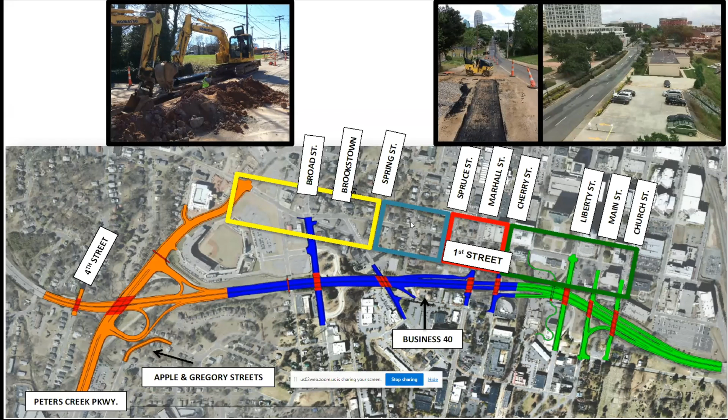Major utility upgrade scope of work. The city of Winston-Salem's existing water and sewer system needed to be improved, and there was a major water main upgrade along First Street right through the heart of downtown, from Peters Creek Parkway on the west side all the way to Church Street on the east. This work was completed in 2 block segments, and we coordinated for road closure and detours with both NCDOT and the city of Winston-Salem to accomplish this work.

Intersection improvements throughout the downtown area needed to be in place before the shutdown started. Utility relocation and upgrades were a big deal on the project. Most utilities had been in place for decades, and sometimes records were very scarce. It took a lot of coordination between the department and the city and utility owners to sort out what facilities were active and which ones were abandoned.

As can be expected, dealing with old infrastructure led to some challenges, but luckily we had a great team in place and a lot of help from NCDOT to get through obstacles so the shutdown could occur as quickly as possible.

Once the Peters Creek Parkway was constructed, the closure of I-40 Business began the fall of 2018. This allowed construction crews to start demolition of the existing roadway and bridges and begin reconstruction. The team focused on construction on the east end of the project. The eastern ramps were open to traffic in the fall of 2019. This allowed the highway traffic to access the downtown area from both the western side and now the eastern side of the project.

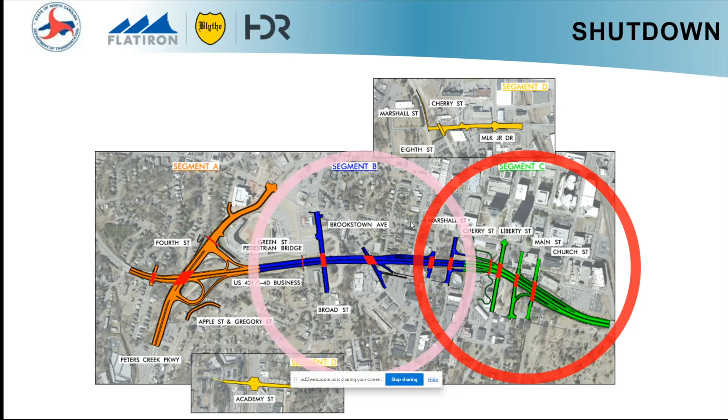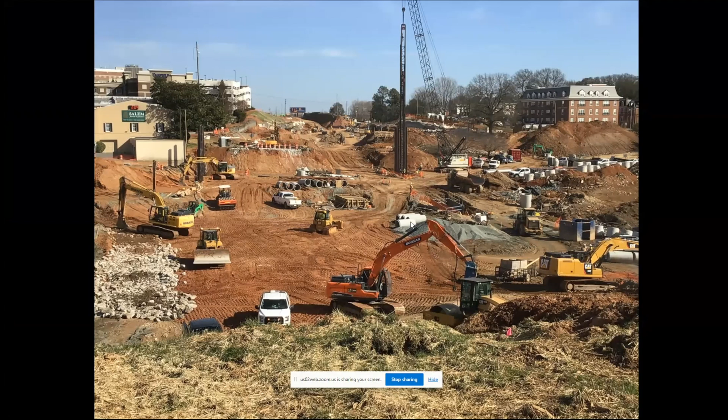The old highway was closed to traffic on November 17, 2018, and demolition started. This was, again, the first time NCDOT allowed complete closure of such a major highway for reconstruction. Once the shutdown began, it was essentially all hands on deck. Construction occurred concurrently in multiple areas throughout the project location.

Let's see, we have a couple of aerial photos. These aerials show progress between September 2018, prior to the closure of the highway, and December of 2018. So that's only 3 short months, just after the shutdown began. The photo here shows all the work at the Peters Creek Parkway area had to be complete before the shutdown began.

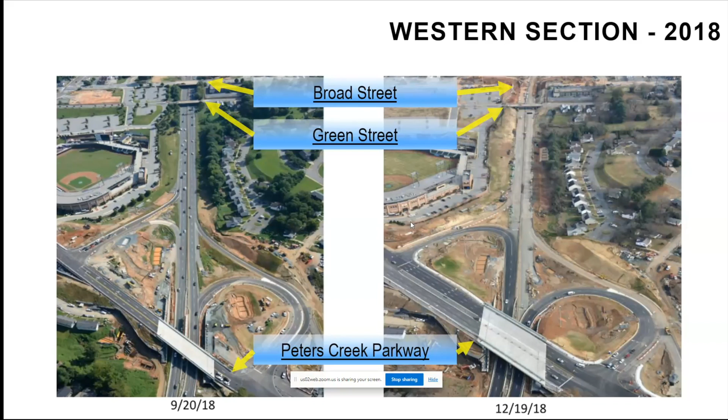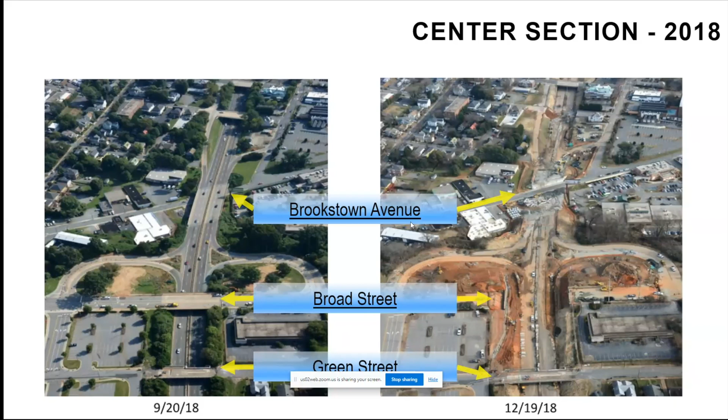This is the center area of the project. As you can see, a few of the existing bridges had to remain in place, which provided that north-south connectivity into the downtown area. And this photo is of the center to eastern section of the project. And there were some pretty significant changes to the roadway profile in this area.

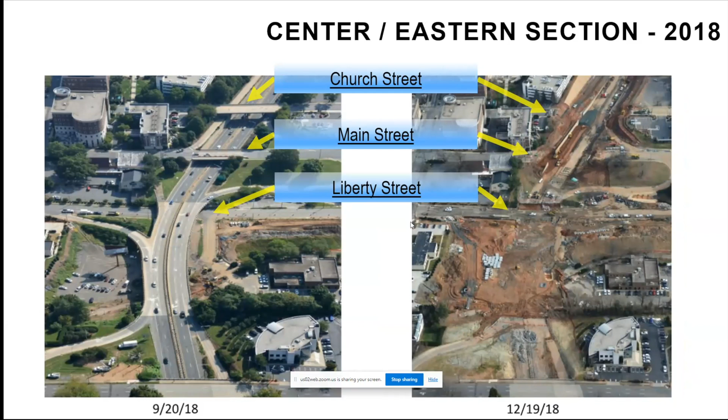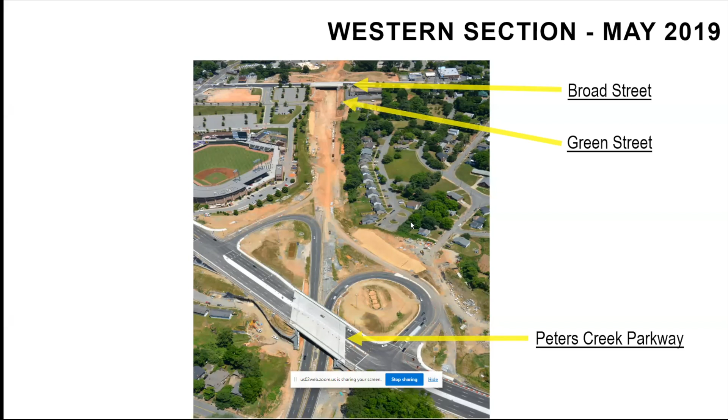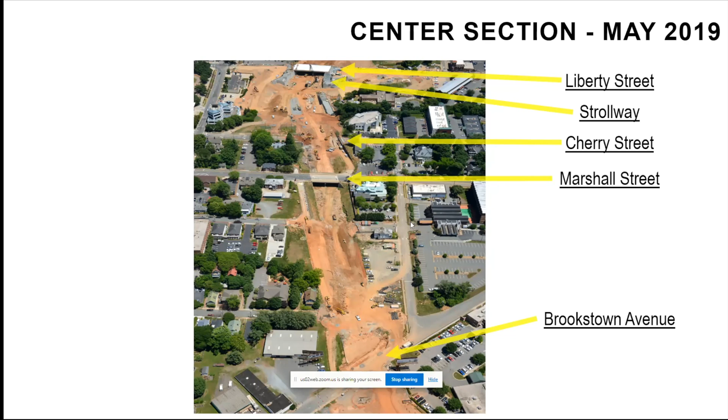At the eastern limits of the project, the new Main Street Bridge and Church Street bridges are complete and open to traffic. Again, this is just 6 months after the closure began. Main Street and Church Street were reconstructed and open to traffic, which allowed access into the downtown area. And this was followed by Liberty Street just 2 months later.

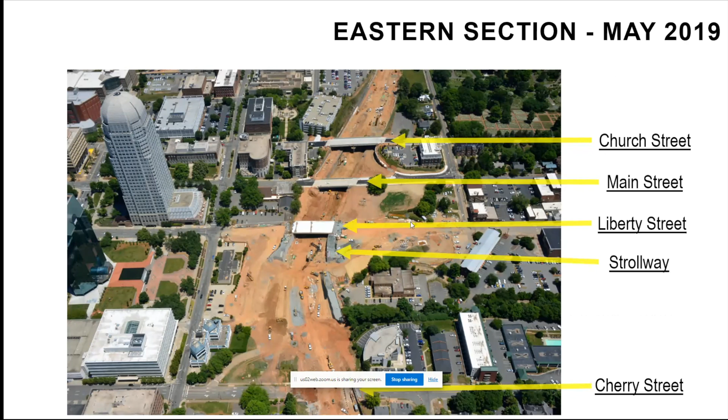To increase the clearances under the bridges while reducing impacts to the surrounding downtown areas, we had to lower the roadway profile and construct retaining walls. We had just about every type of retaining wall you can imagine on the project, from MSE to soil nail, cast in place concrete, and we even had some hybrid combination walls.

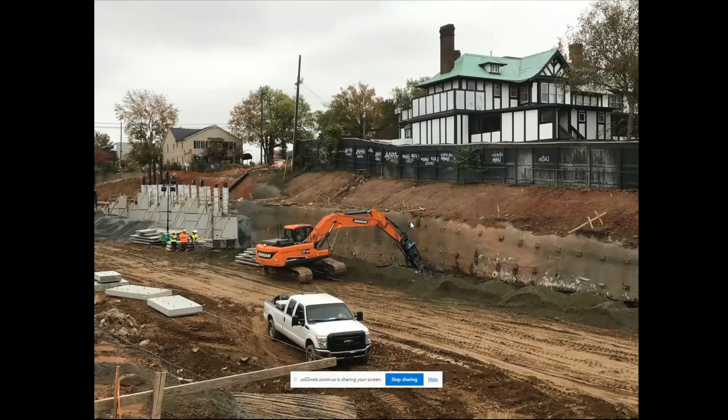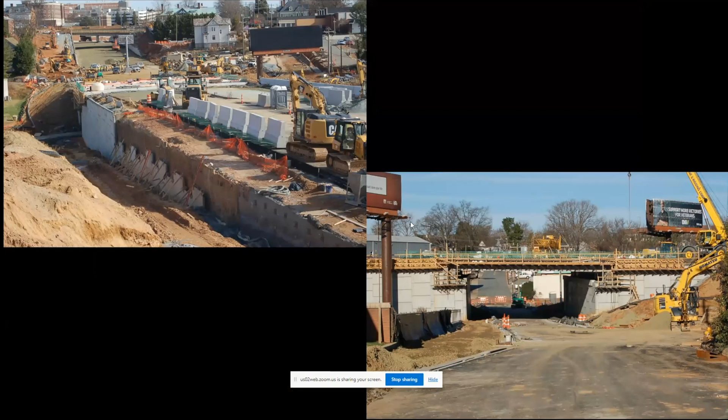This photo is an example of where we needed to avoid right-of-way impacts to historic boundaries. So you can see we used soil nail retaining wall transitions to MSE retaining walls at the bridge abutments. This photo shows one of the larger fill areas on the project and utilized a combination of MSE retaining wall and soil nail retaining walls to support the main line.

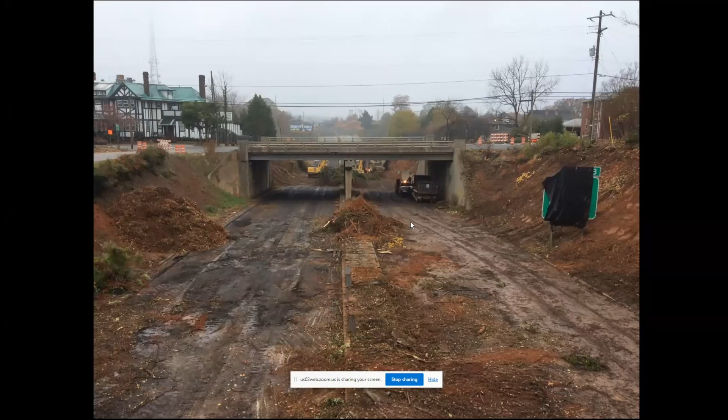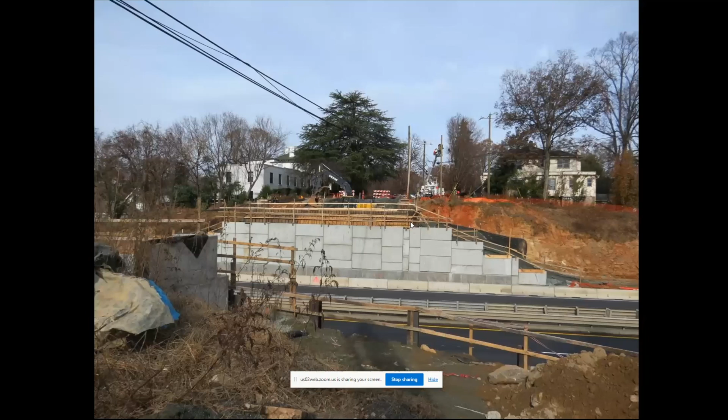The removal of existing bridge abutments can require large excavations. So we needed to consider these bridge abutments being removed when we evaluated the retaining wall types to go back in place. And throughout design and construction, it required close coordination with utility design and utility relocation for both overhead and underground utilities.

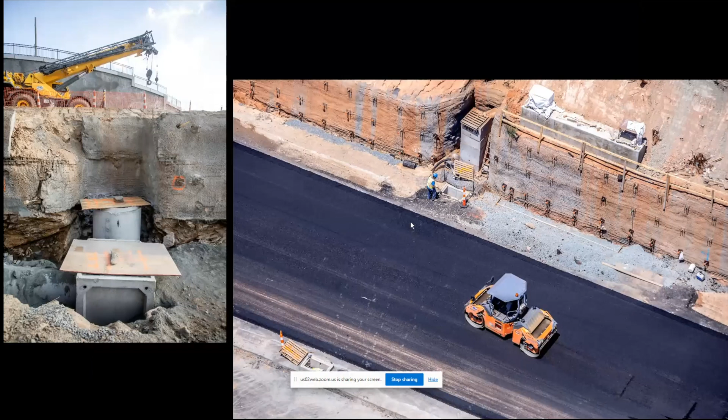Detailing the retaining walls around roadway drainage structures could be tricky, and it took a lot of coordination from the team to accomplish that. There were some instances during construction where the location of roadway drainage needed to be shifted, and we needed to make sure that any adjustments got carried through to the other disciplines.

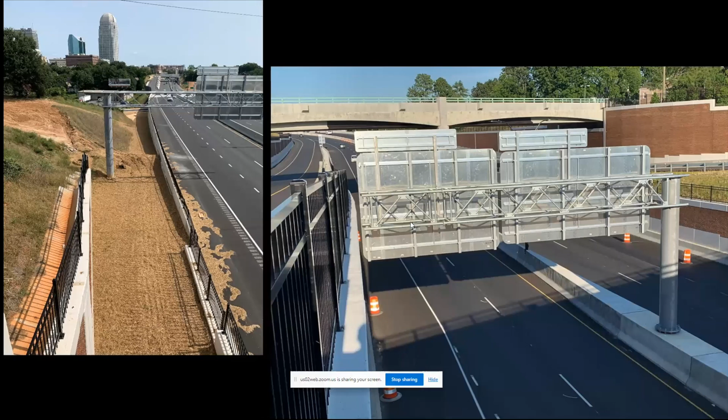In tight conditions on a project similar to this, it's important to consider placement and the details of overhead sign structures also. So be sure to coordinate those details early in the process.

So this project was a bit different than some of our typical NCDOT projects because the city of Winston-Salem was very involved throughout the project. They're essentially another owner because the project affected the city so greatly. We had specific committees where the design build team met with NCDOT and the city, and we would discuss important elements of the project.

We discussed aesthetics, a lot of talk about the multi-use path, signals for both NCDOT and the city, and of course, the water and wastewater utilities.

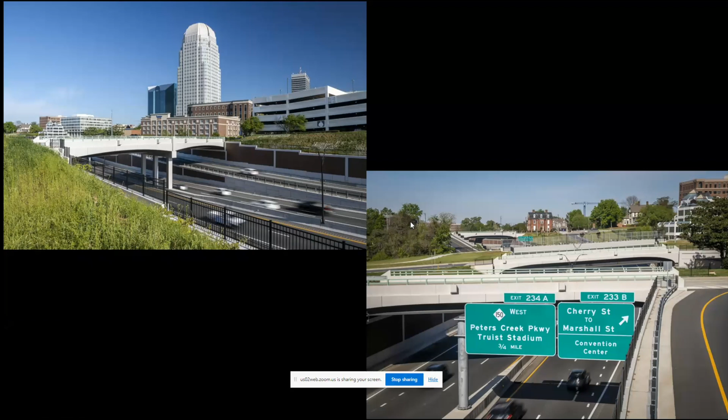Part of the aesthetic package, the new bridges included aesthetic elements that you can see here in the photo. You can see the decorative precast arch facades on the bridges. You can also see concrete pedestals on the bridges for future bridge lighting. And then the exterior face of the girders were painted to provide shadow effects to help the arches stand out.

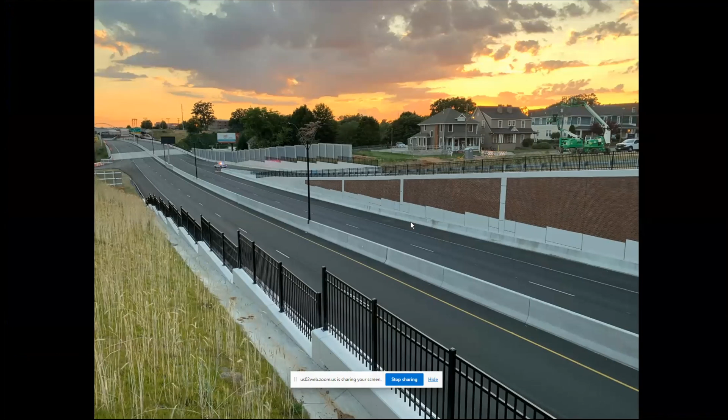Again, because aesthetics were such an important part of the project for the city and the community as a whole, a part of the aesthetic enhancement was to use brick facing on the retaining walls. You can see examples of finished product here with the brick facing on the retaining walls, along with the vertical concrete separations. There was ornamental fencing, which was specified along much of the corridor. And there was also textured noise walls, and you can sort of see that in the background of the photo.

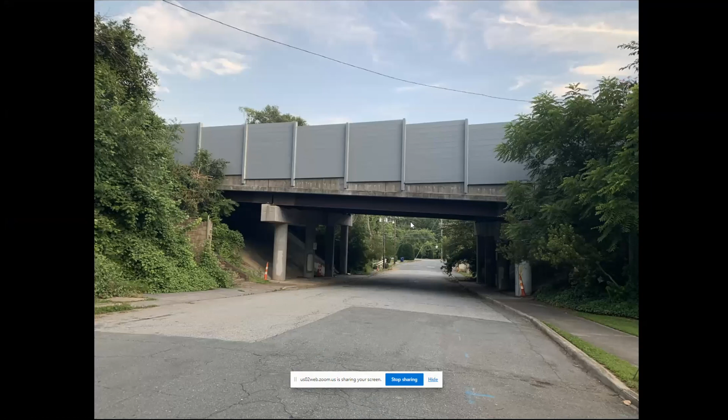A lightweight noise wall was attached to the existing bridge over Crafton Street, located on the western limits of the project. The design build team coordinated the panel texture and color with the city and the DOT.

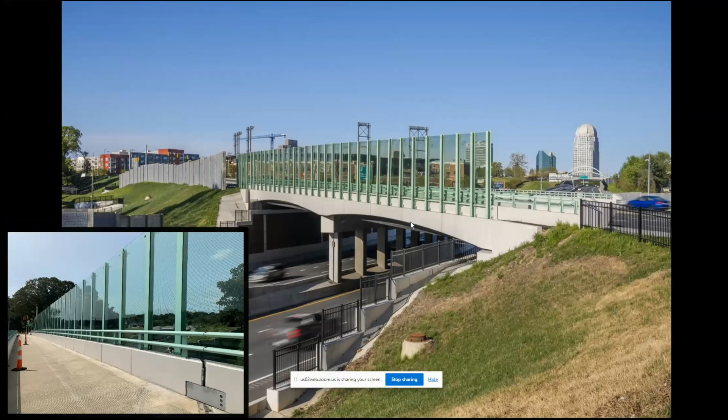And a transparent noise barrier was required along the Peters Creek Parkway Bridge. This interchange is a gateway into the downtown area from the west. So a transparent noise barrier was used to avoid obstructing the view of the downtown skyline as the motorist approached the downtown area.

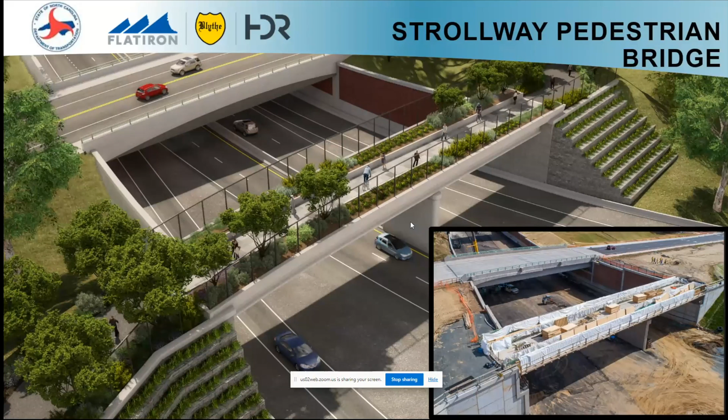So the Strollway Pedestrian Bridge is one of the two signature structures on the project. It's located near the center of the project, and the city of Winston-Salem wanted to have a bridge that provided a unique park-like experience for its users. In the corner is a construction photo from November of 2019, and it's got a very similar view as the rendering.

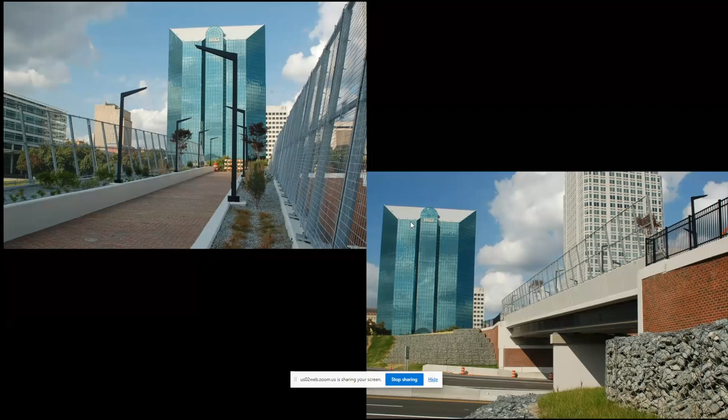So there are built-in planters along both sides of the brick pathway. There's decorative lighting along the fence and in the bridge deck along the path. And the pedestrian fencing is tilted out away from the pathway to give an open feel.

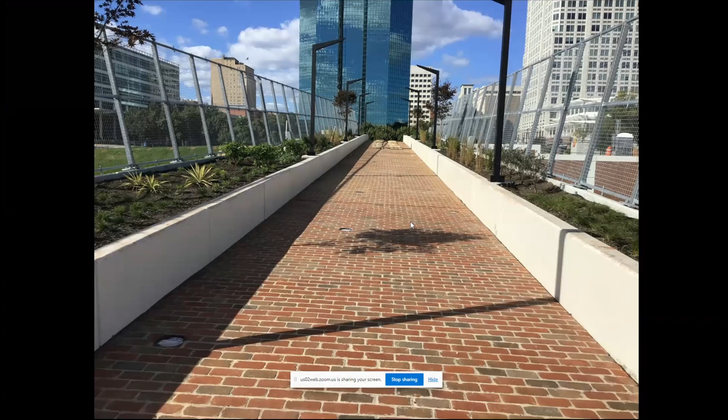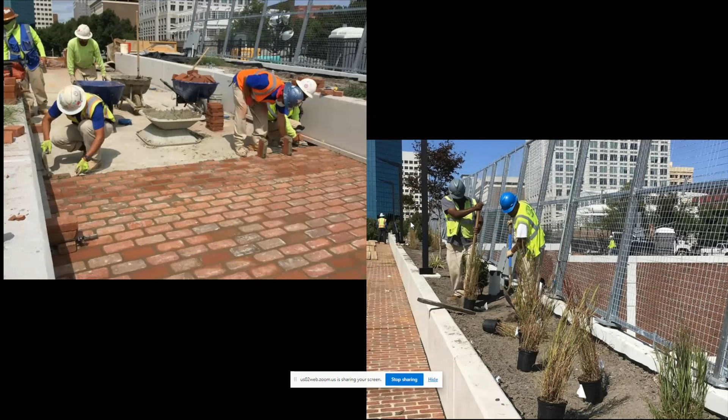And the team worked very closely with the city to help determine the height of the planter walls and the angle of the pedestrian fencing tilting outward, as well as the material to use for the pathway. The city chose to have brick pavers along the pathway, which coordinated with other pavers throughout the city. So our design also included landscaping for the planters and irrigation and drainage plans.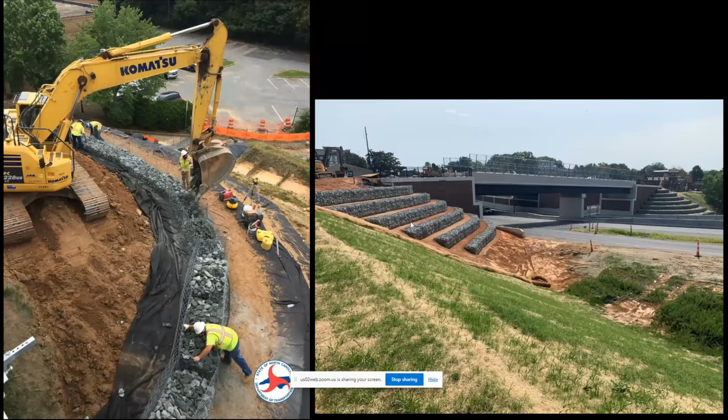The team worked with both the department and the city to develop a tiered gabion basket system at the bridge abutments. And these were added for aesthetic interest. So here are just a couple of photos of the finished bridge. You can see that the exterior concrete girder was painted dark to provide that shadow effect.

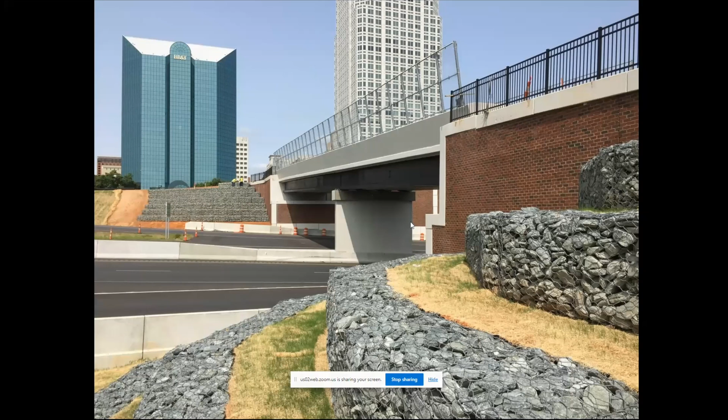And a solid pier wall for the interior bent was an aesthetic requirement by the city. In this photo, you can see the pedestrian lighting from above, as well as the lighting in the bridge deck itself, and you can see the finished landscaping.

So now the Green Street Bridge. The Green Street Pedestrian Bridge is a signature structure crossing the corridor and connecting to the multi-use path near the baseball field. The structure is a self-tied arch with two sets of inclined arches and a longitudinally post-tensioned concrete deck. I don't think you'll see another one like it in North Carolina.

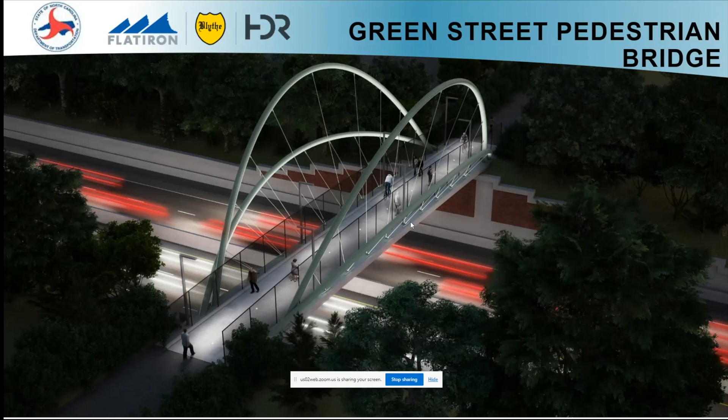The city of Winston-Salem and NCDOT provided a concept and prescribed aesthetic requirements for the structure. And the design build team led by HDR worked closely with the clients and other stakeholders to design and construct this innovative structure, meeting the aesthetic and functional objectives of the concept.

During the early stages of design, we met regularly with the city's Creative Corridors Design Review Committee, and we incorporated aesthetic features throughout the project to really bring their vision to reality. The geometric layout of the bridge, the shape of the arches, the hanger rod arrangement, and some of the connection details were just a few of the features that we coordinated on the Green Street Bridge.

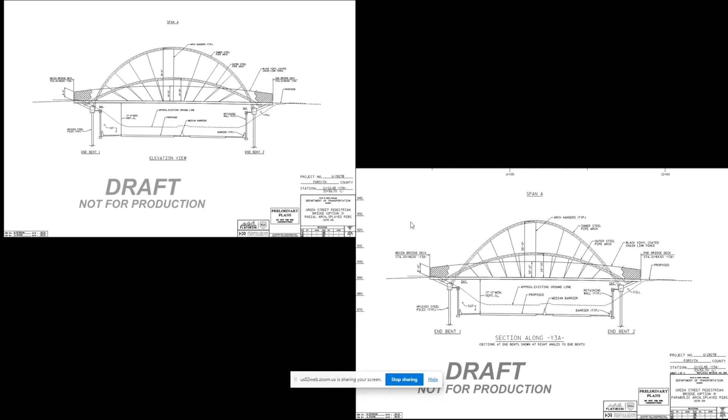So the bridge, again, it's an unbraced self-tied arch structure. It's got two sets of inclined arches and a longitudinally post-tensioned concrete deck. The taller pair of inner arches are inclined outwards at 13 degrees, and these arches carry most of the load. The lower pair of arches are inclined outward at 30 degrees, and they do carry some load, but not as

much as the inners. The bridge deck itself is supported by a series of stainless steel hanger rods. There's 9 hanger rods to each arch for a total of 36 hangers. Lower gusset plates are embedded in the concrete edge beam of the bridge deck, and they're used to connect the hanger rods to the bridge deck. And upper gusset plates, which are welded to the steel arch ribs, are used to connect the hanger rods up high. And the steel arch ribs are connected to concrete pilasters with anchor rods.

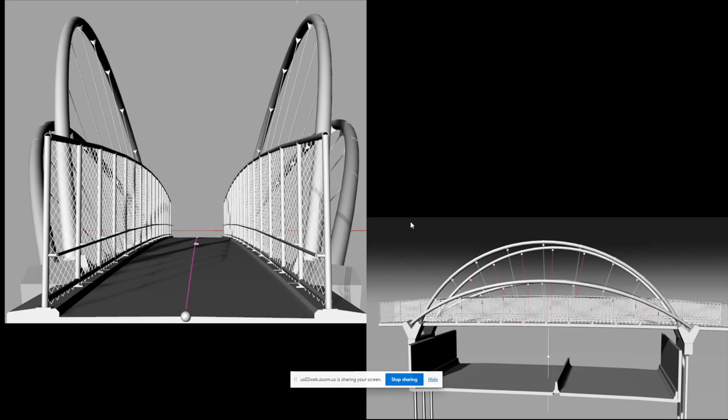So as you can see, there's a lot of complex geometric features with the bridge, which affect the design and carry through to fabrication and construction. We needed to make sure there's symmetry in the arch curvature along the length of the bridge. We balanced the way that the arches tilt from one side of the bridge to the other. The location of the upper gusset plate connections along the length of each of the arches and the angle of these connections was important. The location of the lower gusset plates in the concrete deck edge beam, as they're located along the length of the bridge and from side to side, and even the height of the gusset connections were important features.

Deviations in any of these elements changed the angle of the hanger rod connections and changed the design loads. So those were important for us to keep a close eye on. The uniqueness of this structure required tight tolerances on several of those details. And during design, we developed a parametric bridge design model. This was beneficial in the staged analysis of the structure and proved to be an efficient way in understanding the behavior of the bridge from the different elements, especially if one of the features mentioned above needed to be adjusted. It helped us to update our design model quickly.

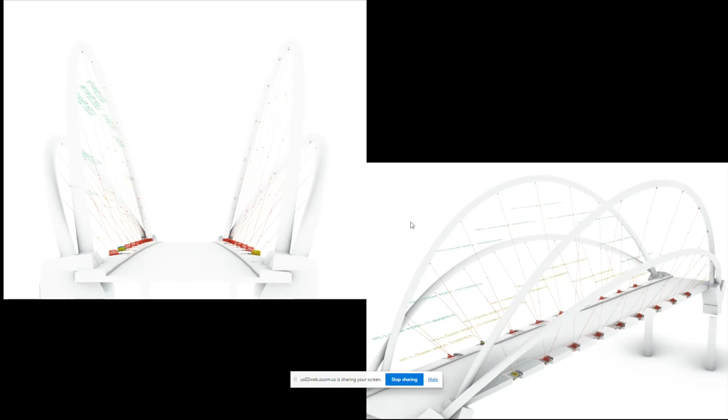So the Green Street Bridge crosses the highways in a location where there are long retaining walls on each side of the roadway. So before construction could start on the bridge, we needed to install the bridge foundations and build the retaining walls near the abutments. Temporary shoring towers were built to support the bridge deck false work. The shoring towers were located at the face of the retaining walls along the outside shoulders of the roadway and near the middle of the bridge in the roadway median area.

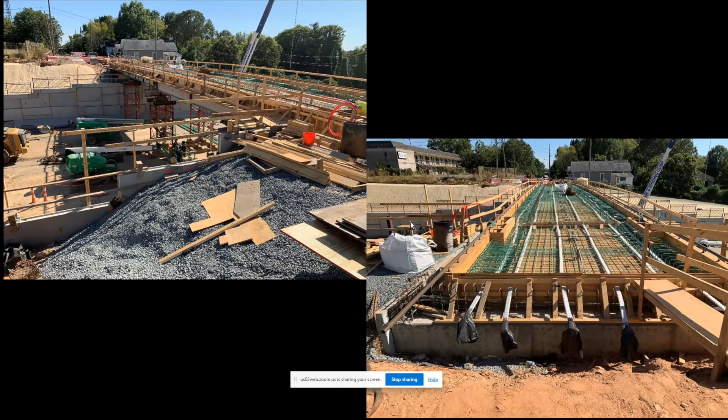The bridge deck false work was supported on longitudinal beams spanning between the shoring towers. There was enough vertical clearance underneath these temporary beams to allow highway traffic on the new roadway to flow without vertical clearance issues at a later stage of construction. The bridge deck was cast on false work, and then it was longitudinally post-tensioned.

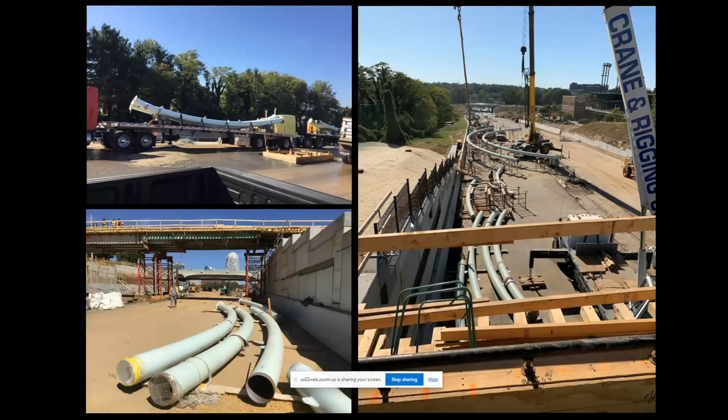The steel arches were fabricated in sections and then shipped to the site. You can see in the photo that gusset plates for the hanger rods were shop welded to these arches during fabrication. The arch sections were then assembled on site, and they were surveyed and confirmed for proper alignment before they were welded together.

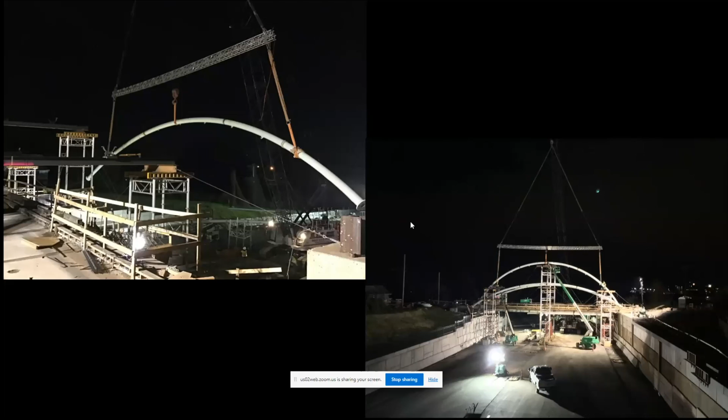Once the arch ribs were welded together, each of the 4 arches were lifted into place. The arch ribs were held in place by a series of temporary shoring towers and bracing. Having no highway traffic below the work area made it much easier to use temporary shoring configurations.

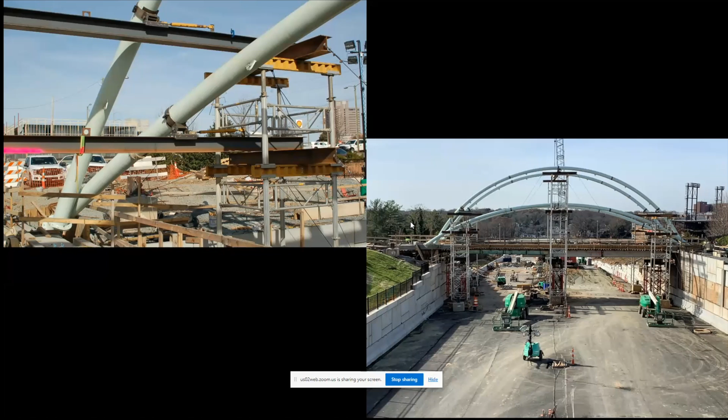One of the challenges was how to position and hold the arches to the correct geometry. An intricate bracing system was used to position the arches, hold them securely in place, and make subtle adjustments to the arch alignments. The bracing system allowed supports to slide along the cross beams for these subtle adjustments, and the arch ribs could be rotated within the collar connections to adjust for the proper alignment.

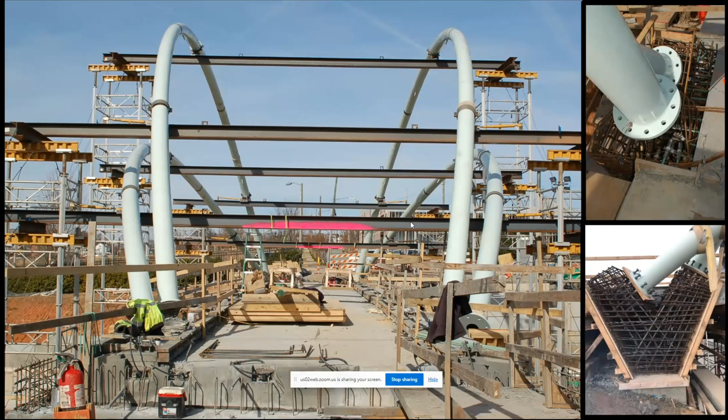These adjustments in the bracing system were critical for positioning the arches at the correct angle and maintaining proper alignment for the anchor bolt connection to the concrete pilasters. The concrete pilasters themselves had detailed geometry on the concrete surfaces for several different angles, and to eliminate fit-up issues on the pilasters, the anchor bolts were cast after the arch ribs were set into place. Kind of think of it as a match cast operation, similar to what you see in a casting yard.

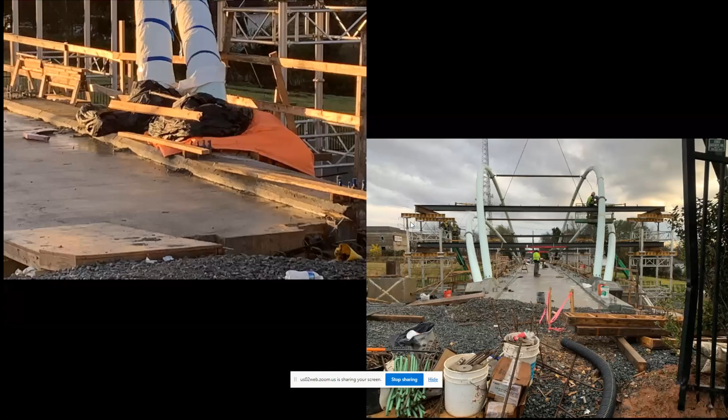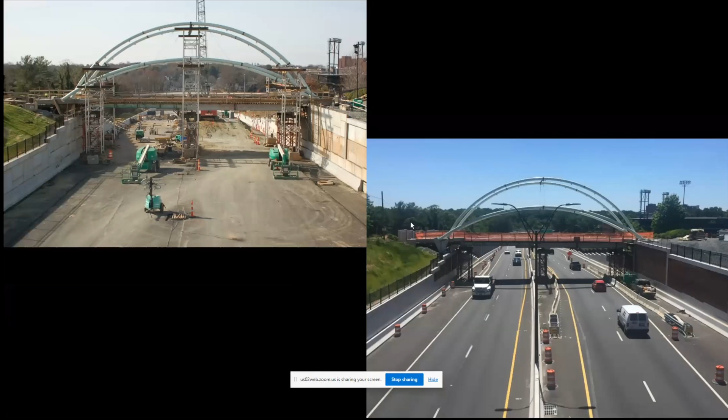With the arch ribs positioned and supported and the anchor rods placed, the concrete pilasters were then poured. Once the pilasters cured, the anchor rods were tensioned, and this allowed the arches to support themselves. With the arches now self-supported, the temporary arch rib shoring towers could be removed in preparation for reopening the highway corridor to traffic. The arch rib cross bracing, however, stayed in place.

At this stage, we performed a 3-dimensional point cloud survey of the structure. This detailed survey confirmed the arches were in the correct position and allowed us to recheck the distances between the gusset plate connections and confirm those hanger rod lengths. Shortly after the temporary shoring towers were removed, the Salem Parkway was open to traffic, and the bridge deck falsework stayed in place.

So the Salem Parkway was reopened to traffic on February 2nd, 2020. That's only 14 months since the shutdown began. So getting the Green Street Pedestrian Bridge constructed to this stage was an important part of reopening the highway. It was an incredible effort by all the team members. Although the highway was now open to traffic, there's still quite a bit of work to be done to finish the bridge.

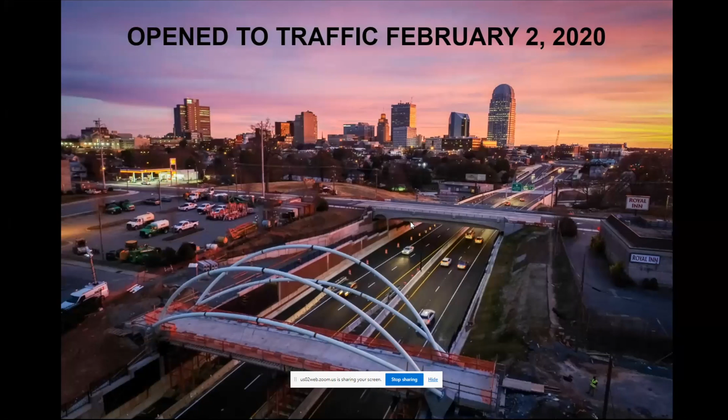The next step was to install stainless steel hanger rods. Under nighttime closure of the highway, the hanger rods were installed, connecting the bridge deck to the steel arches. During the initial installation, the hanger rods were installed loose and they were not tensioned. You can begin to see the complexity in the different angles between the hanger rods and the gusset plate connections. For the connection between the hanger rods and the gusset plates, we used oversized forks and pins, and this allowed for greater tolerance of rotation. This helped in cases where the gusset plates may not be exactly aligned per plans.

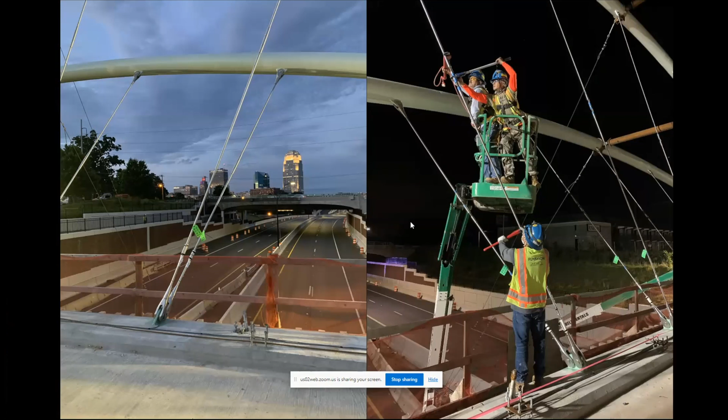So the hanger rods included turnbuckles, which allowed the supports to be tensioned to the proper load. We were able to increase or decrease the load by adjusting the turnbuckles. The first stage was to tension the hanger rods to the inner arches. This step transferred the full weight of the structure to the pair of inner arches. At a later stage, the outer arches were tensioned, and once that stage was complete, the structure load is shared between the inner and outer arches.

So to accurately measure the tension in the hanger rods, Flatiron hired WJE as a subcontractor to install strain gauges on the hanger rods and provide real-time feedback on the loads. So we worked closely with the subcontractor, utilizing that real-time feedback in order to adjust the loads in the hanger rods using those turnbuckles. We did this for several different stages: when we loaded the interior arches, when we loaded the outer arches, once again when we removed the temporary cross bracing between the arches, and then finally under a final condition after the fencing and lighting elements were installed.

It was a pretty tedious process. Making the adjustments to one of the hanger rods changed the tension in the other adjacent hanger rods along the structure. But we worked to balance these forces left and right of the bridge, as well as along the length of the bridge.

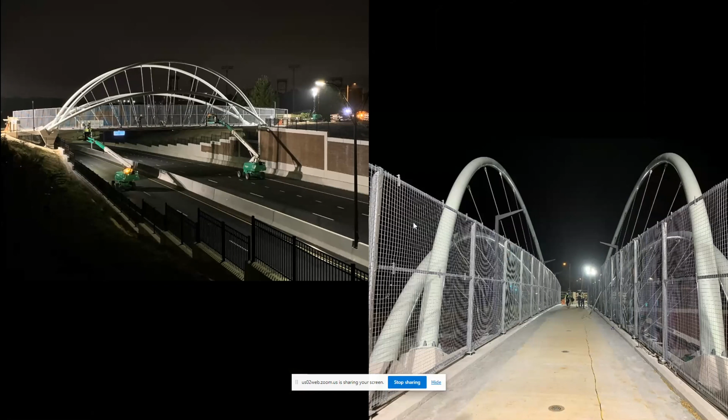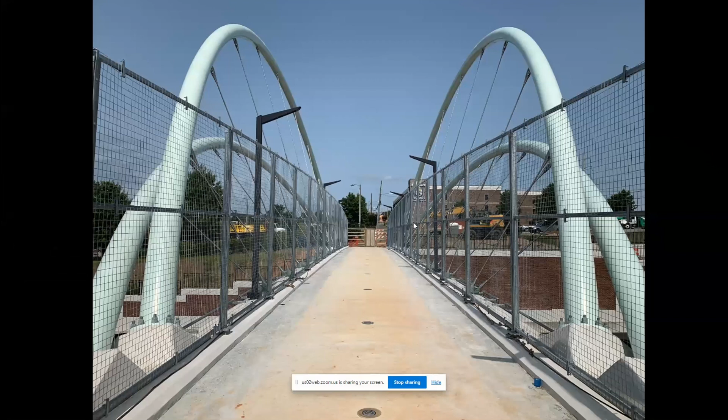So now that all the temporary bracing is removed and the structure is completely self-supporting, the temporary formwork beneath the bridge was taken down. The bridge lighting and pedestrian fences were the final elements to be installed. Here's just a couple of photos of the completed structure. There's pedestrian lighting on the bridge deck, in the bridge deck, and then along the bridge deck pathway too. And there's also decorative lighting on the arches.

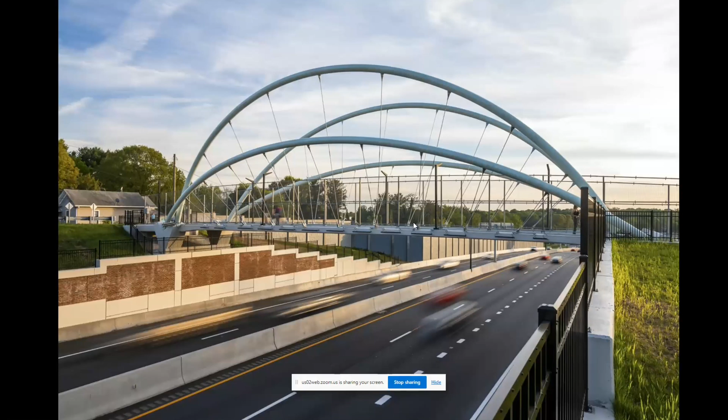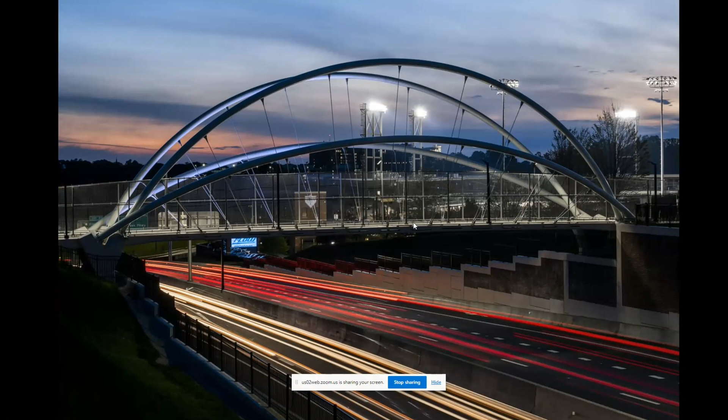Pedestrian fencing is also added for safety. So you can see in the photo, the decorative lighting is added to illuminate the structures at night. And here's a pretty nice photo of the bridge at dusk. It's being lit by the aesthetic lighting, and you can see the baseball stadium there in the background.

And so the next few slides have just a few before and after photos to show the enhancements along the corridor. Again, this was a project that the city and the community as a whole was really proud of. So this is an aerial view west of the Strollway Pedestrian Bridge. On the left, you see the before, on the right, you see after.

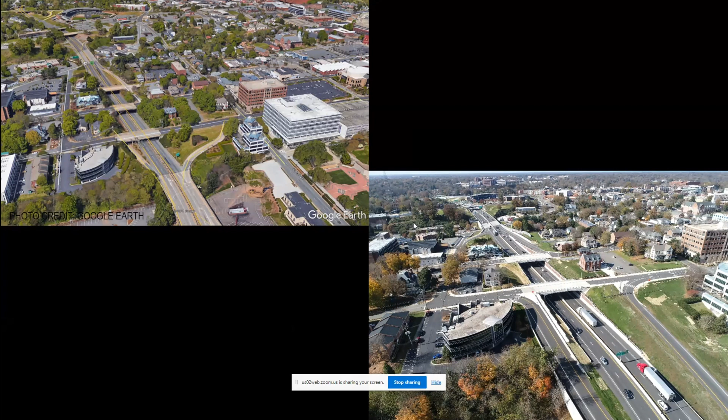So this area is just east of the Strollway Pedestrian Bridge. You can see Main Street and Church Street. This is an area where we changed the profile pretty significantly. In the old existing condition, you can see the business corridor had a large bridge that went over Liberty Street there. In the new photo, that was switched where the mainline corridor went beneath all of those structures and Liberty Street was taken up and over.